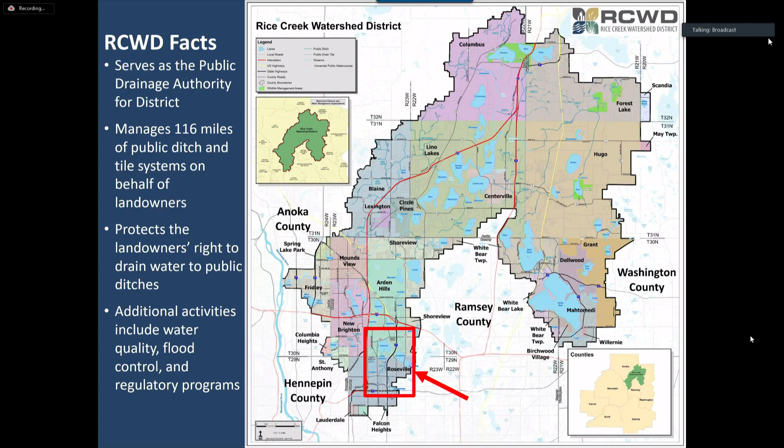It's our job as the drainage authority to protect the landowner's rights to drain to these systems and maintain the system so that they have access to that. Additional activities the Watershed District does, other than public drainage system management, include water quality and flood control, and we also have regulatory programs for permitting.

All right, very good. I'll launch into the rest of the presentation here on RCD4. We'll go through the repair report and the WMD charge and the establishment of it. As already discussed, if there are questions or comments, there will be a formal comment period at the end of this presentation, so if you wouldn't mind, please hold your comments and questions till the end.

We'll look at the standard for decision, a brief timeline to date on the system itself, the current conditions of Ramsey County Ditch 4, and the proposed plans to repair the drainage system and the cost associated with that repair and how we're allocating those costs. Then we'll walk through a brief high-level schedule for the repair, and as stated, we'll have a comment period at the end.

Generally, as a quick overview, why do we maintain the public drainage system? It fulfills the Drainage Authority's responsibility as required by statute, by Minnesota law. It provides predictable drainage and stormwater management, which we'll talk through in a moment. There's also a public health and welfare component to repairing the ditch and keeping it functioning in good working order, as well as protection of infrastructure, whether that's culverts, utilities, etc.

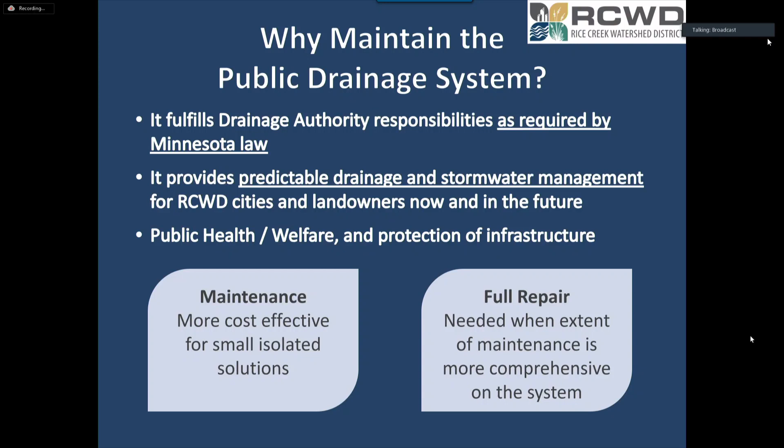So generally, what do we mean by predictable drainage and stormwater management? A lot of times we look at different recurrence intervals for storm events. I've listed from top to bottom the 2-year storm event - that's your typical drainage event, about 2 to 3 inches in your rain gauge after about a day, which is the standard drainage event we hope to convey through these ditches. Your traditional stormwater event is more of that 10-year rainfall event, 4 inches plus after about a day. And then we have those FEMA level floodplain 100-year type events, 7 inches plus, often associated with a snowmelt runoff event.

So just to keep everybody on the same page, the repairs we're talking about tonight will have almost no effect on those 100-year FEMA type floodplains. We should expect almost no change there. We're really focusing on those 10-year and below events that we believe this ditch can convey adequately. So that's what we're talking about here tonight.

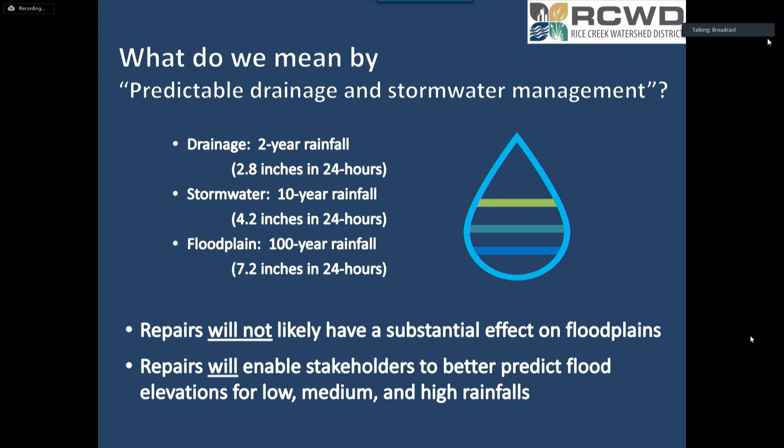We're going to talk a little bit about the standard for decision. We'll have Attorney John Kolb speak a little bit about the statutes. We look at whether repairs are necessary, and then we look at whether the repairs as recommended are in the best interest of the lands affected, those who use the system, for an outlet for drainage. So I'll pass it to John here for a moment.

Thank you, Adam. Mr. President, Board, we can all look at the standard that's up on the screen, including the audience. If you can't see the screen, we can articulate it directly. The President also alluded to this in his opening remarks. But the consideration of whether the repairs are necessary really looks at what is the function that the drainage system historically provides and is needed to provide for the benefit of everybody that is discharging anything toward that system.

In this case, the system is unique in that it is supporting a lot of the stormwater management in the city of Roseville. So if this ditch falls into a state of disrepair, we run into conveyance issues with that stormwater, which, as Adam pointed out, is designed to take a 10-year storm off the landscape, while the ditch is intended to convey a 2-year storm - so we already have a bit of a disconnect historically. But if this system gets out of repair, then we have localized flooding adjacent to the ditch and in other parts of the city and the adjacent watershed. So the consideration of how efficiently it's functioning is important in terms of determining whether the repairs are necessary.

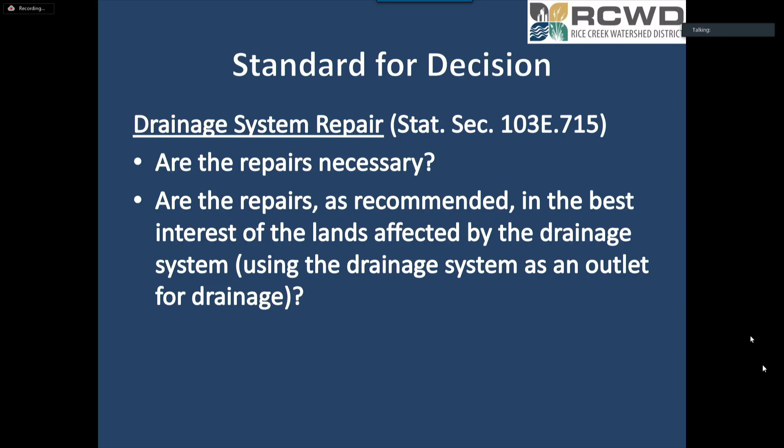If there's no questions of me, I believe the engineer's going to go over the watershed area and the condition of the ditch. Thank you, John.

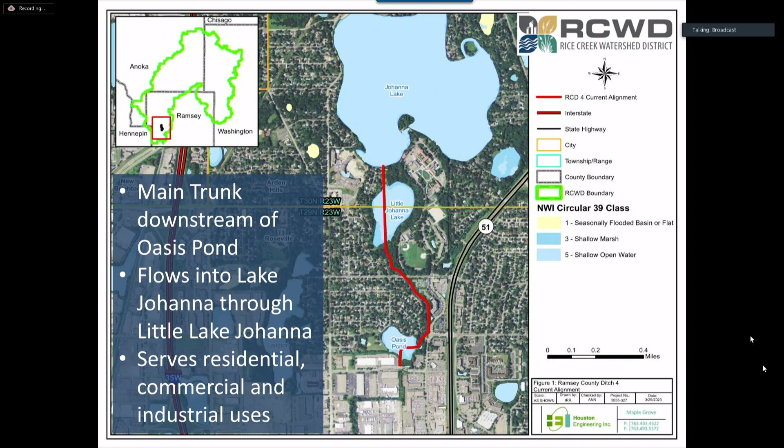Just a quick overview of the system. I've highlighted in red the portion of RCD4 that we are looking to repair. The repair starts on the downstream, or north side, of Oasis Pond. We are flowing north for this ditch, through Little Johanna Lake and into Johanna Lake, and that is the portion we're looking to repair with this project. We do serve residential, commercial, and industrial uses for this ditch.

A very brief history of recent events on RCD4. In 2010, there was pond maintenance for Oasis Pond. In 2013, there was some tree and deadfall removal. It was a bit of a recurring issue in 2016 and 2019 as well. In the spring of 2018, the ditch experienced some flooding at multiple locations. I was not personally involved with the project at that time, but some of you are familiar with it.

At that time, in 2018 and 2019, the district and the board launched into a historical review of Ramsey County Ditch 4, and we looked at various things: what was the historic profile of the ditch, and what was the historic established right-of-way contemplated for construction of the ditch, and that sort of thing. It establishes our legal boundary for which we can repair the ditch without calling it an improvement of capacity or grade.

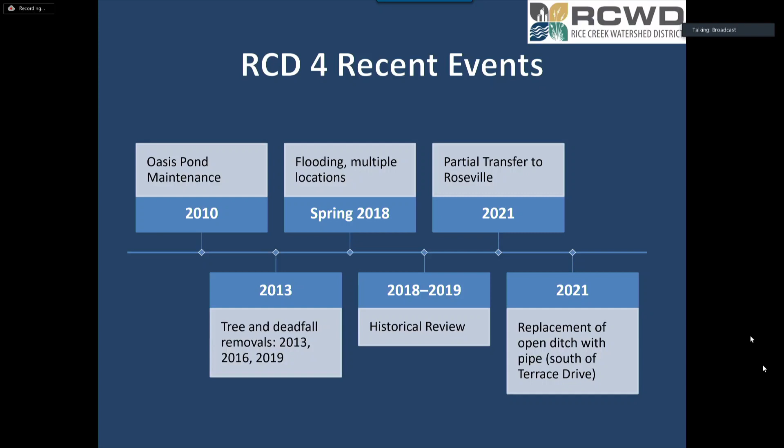And then in 2021, there was a partial transfer of the ditch to the city of Roseville. I'll talk about that more in a second. There was a portion of the open channel ditch that was replaced with subsurface drainage tile, south of Terrace Drive here. I'll show that on the screen.

As far as the repair we're looking at now, again downstream or north of Oasis Pond, what we are seeing on the ditch is excessive tree canopy shading. It's preventing sunlight from reaching the channel banks, which is preventing the growth of tall grasses and deep-rooted vegetation. We're seeing sparse tree vegetation on the banks, and that's not sufficient to hold the earth on the banks from running into the ditch.

We are seeing that the RCD4 has a relatively steep grade, so any sediment coming off of the ditch banks is actually not accumulating in the channel.

It's continuing to run downstream into Little Johanna Lake, and that is a problem we're looking to correct with this repair. We also need to establish a maintenance corridor for district staff to access the area when small maintenance activities are needed. If a tree falls into the ditch, there's simply no way we can get in there to clean it out at this point. So that's a big part of what we're doing here.

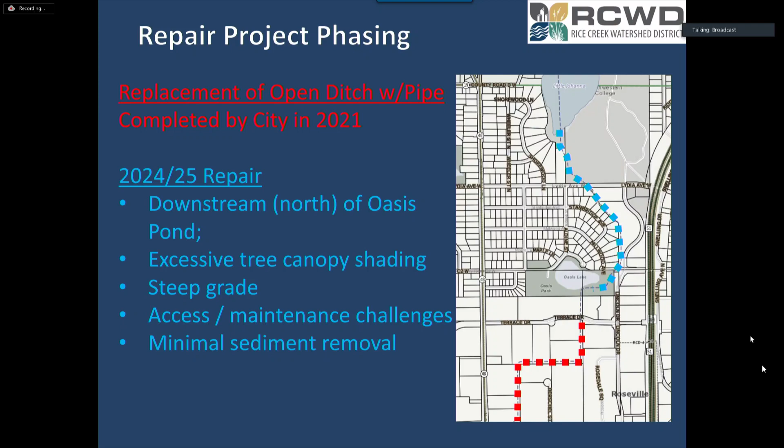Just a few slides to show the conditions on the ditch. We did a site walkthrough a little over a year ago and walked the entire site to look at project access points and the condition of the ditch. So we saw a lot of interesting things.

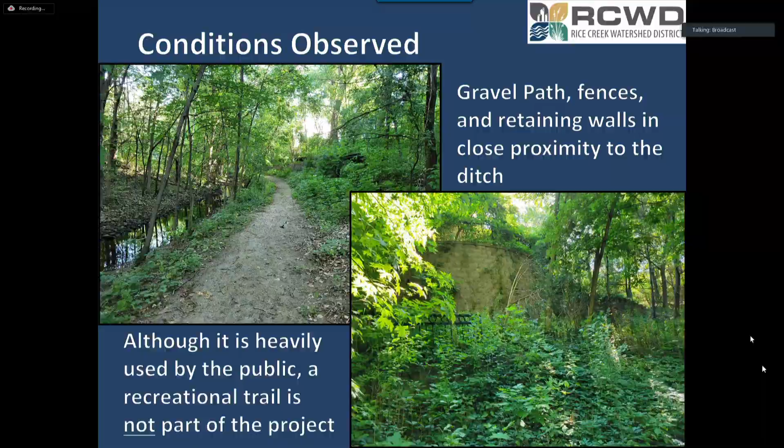There are some recreational trails that have popped up. The public is using them, and maybe shouldn't be. We see gravel paths, fences, and retaining walls in close proximity to the ditch. These are all challenges we'll have to overcome for construction. Again, there's an impromptu trail that has sprung up that isn't intended to be part of this project, and I know that question has come up several times at previous meetings.

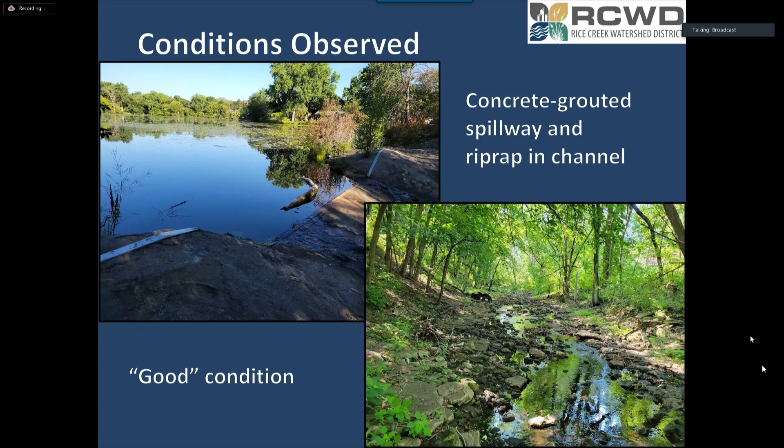At the outlet of Oasis Pond, there's a concrete grouted spillway weir, and there's also riprap in the channel. At one point the channel was nearly continuously lined with grouted riprap. Most of that has since broken up, however it's still in good condition and still providing good function to prevent erosion of the channel. We would intend to simply leave that in place as is.

Our recommended repair for RCD4 is to stabilize the ditch banks and create a maintenance corridor. This would involve tree clearing between the channel banks and for about a 25-foot corridor on one side of the ditch. We'd remove any deadfalls or trees that have fallen into the channel, and then look to stabilize the bank slopes through seeding and potentially erosion control blanket for the really troublesome spots.

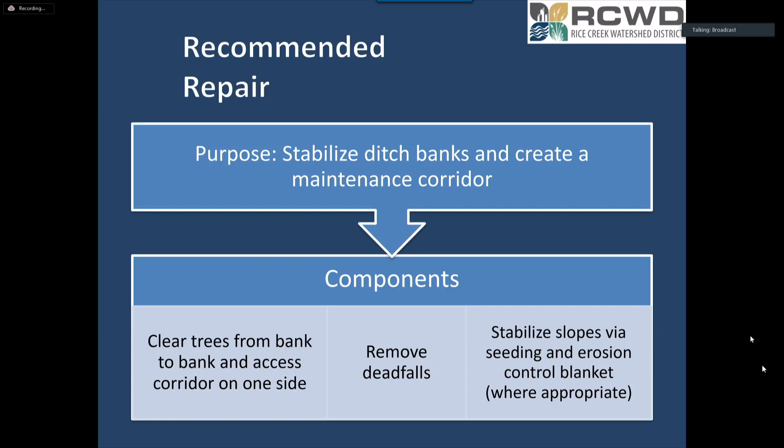For this project, we did have some regulatory concerns to work through. The project traverses 3 public waters: Oasis Pond, Little Johanna Lake, and Johanna Lake. We have no work planned within those public waters or wetlands, and no wetland impacts resulting from the proposed repairs. As John mentioned, we are not making the ditch deeper, wider, or steeper than it was originally constructed, so we're not increasing capacity beyond what was originally contemplated. We're simply bringing it back to those originally established conditions.

We do have a National Pollutant Discharge Elimination System, NPDES, stormwater permit for construction that might be required. It's typically required when we're disturbing this amount of acreage for a project.

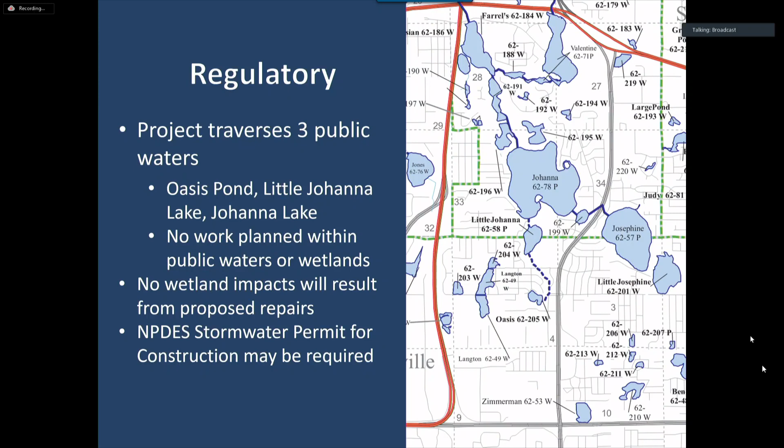General impact avoidance for these species mainly comes down to construction timing and being outside of the roosting or breeding periods for these species. There are several best management practices we can follow with the repair, along with general species awareness. We will include information on these species within the construction packet. The Natural Heritage Information System review, the NHIS review, has already been completed for the repair.

Just a little bit about what to expect. We had a similar project recently this summer, a ditch repair that included tree clearing and a little sedimentation removal in the bottom of the channel. Here are 2 pictures from that repair. The picture on the left is during construction; there's a lot of activity going on, with trees that have been cut down falling all over the place.

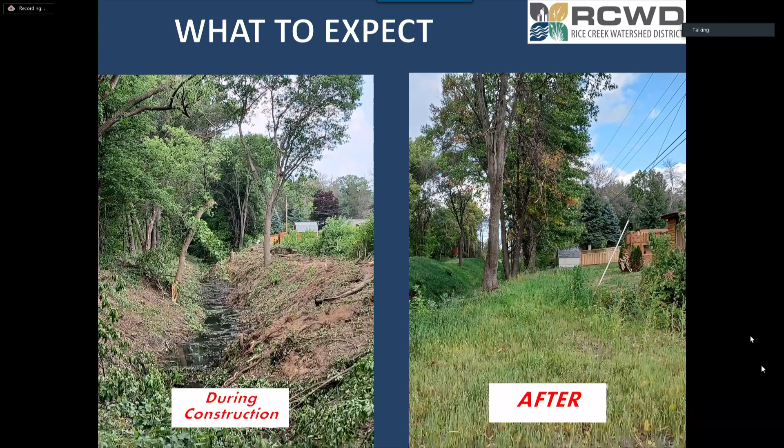As far as management of the ditch bank, generally this project involves no cleaning out of the channel. Again, we're not seeing sediment accumulation in the channel, so we shouldn't have too much spoil to dig out at all. Generally, we'll be using a native seed mix for this repair.

This is a picture of another project. It's got that straw mulch placed right before the vegetation gets fully established. Seed has been laid, but no green has shown up yet. This is an interim condition, so we'll see this same condition on this particular repair as well.

We'll be using herbicide for maintenance. When they cut down the trees, they'll paint a dyed herbicide on the tree trunks to prevent them from regrowing, which will help reduce the amount of maintenance needed into the future.

We always tell the landowners we highly recommend leaving the tall grasses — please, please don't mow them. And please do not place any fences, sheds, or other objects in the right-of-way. It creates quite a headache for maintenance staff into the future as we go in to do minor maintenance or repair if the need arises.

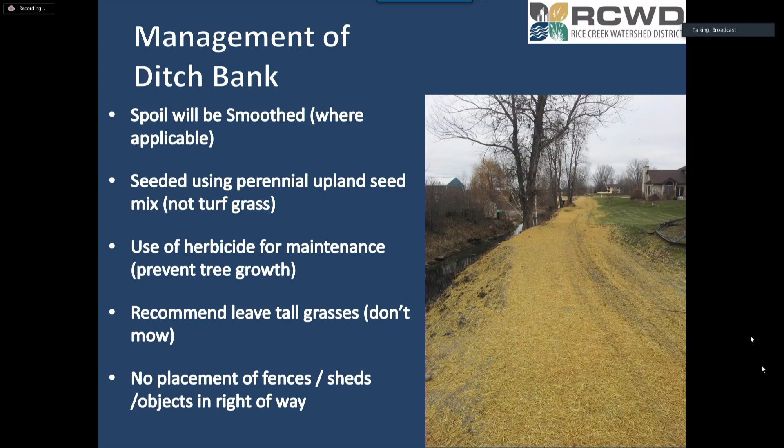Okay, so on to our opinion of probable construction cost. These are what we've put together from a whole slew of other projects. We look at what we're assuming the potential bids will come in at from contractors. These numbers will change once we actually get contractors' bids.

The numbers we're coming up with so far for actual construction costs on the ditch are about $150,000. We have engineering, legal, and administrative fees of about $55,000, and we've thrown a 20% contingency on construction costs for about $30,000. That brings us to a total of approximately $235,000. Again, those numbers will change once we get contractors bidding on the project.

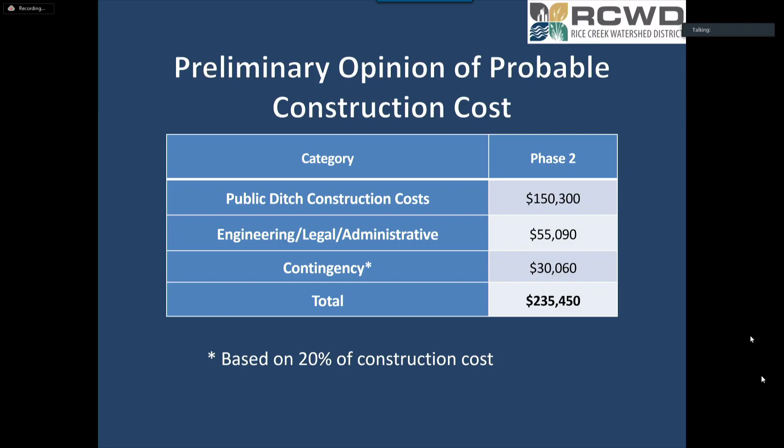So, project funding — how are we actually going to come up with that $235,000? This was already alluded to at the intro, but right now we are looking at a potential split between a water management district and ad valorem taxes across the whole district. There's potential that the board will decide to split up these charges, taking all of the drainage area for Ramsey County Ditch 4 and assessing each parcel a certain portion of dollars based on a handful of factors.

That includes the area of each parcel and the land use of each parcel. Based on the land use, we've assumed an amount of runoff that happens from each parcel, and that runoff then contributes to the ditch and creates a burden on the ditch — or another way to say that is a benefit for that parcel. So we look at a lot of different factors and associate all of them with an actual dollar cost for the project.

It's worth noting that landowners have already been charged once for the prior repair, which was that upstream portion, upstream of Terrace Drive, converted from open channel to subsurface tile. At that time, landowners were notified that there would be a future charge for this next phase of the project. We did not have this repair ordered yet, and we did not have a project estimated cost. Now we do, having the project potentially ordered and an estimated cost, and so we're coming up with that second charge to the landowners on the system.

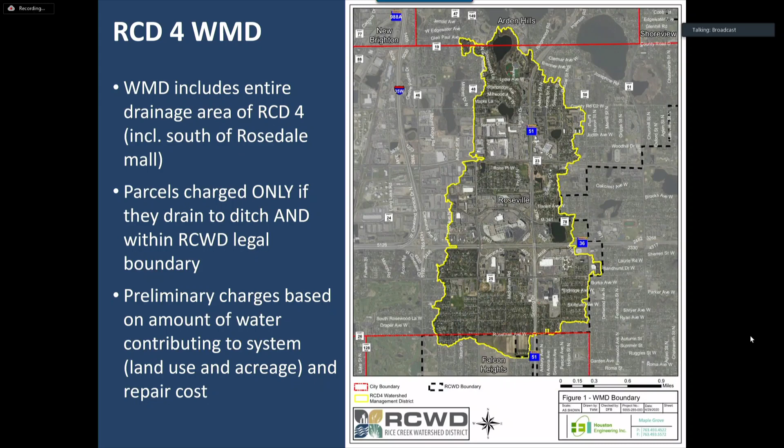For those who really want to, I have 47 pages here tonight of every single parcel. So if you really want to know, we can talk later about what your specific charge would be on your parcel. But generally, if you're, let's say, half an acre on your property, your charge is going to be pretty minimal, to the tune of maybe between $25 and $100 total. So again, all parcels are paying into the system to help contribute to that percentage of the water management district charge for this project.

Okay, almost done here. Just a quick timeline. Back in October, we had a public information meeting. Some of you were there. That went pretty well. We are now currently at the public hearing, that's the meeting that's going on presently. Next week, on December 13th, the board will consider the resolution and ordering of the repair and establishment of that water management district charge. As far as final plan development and specification writing and bidding the project, that is coming this winter, into 2024.

And then as we get closer to the spring of 2024, we'll be meeting with landowners that are within the construction zone. We've actually had several landowner meetings already. So if that's you, you can contact us and we'll get a meeting scheduled and talk through what to expect, where there'll be trucks driving around and all that sort of thing. And then construction, we're anticipating about a year from now, fall, early winter 2024. Dates, of course, are approximate and subject to change based on unforeseen circumstances, but that's our general expected timeline.